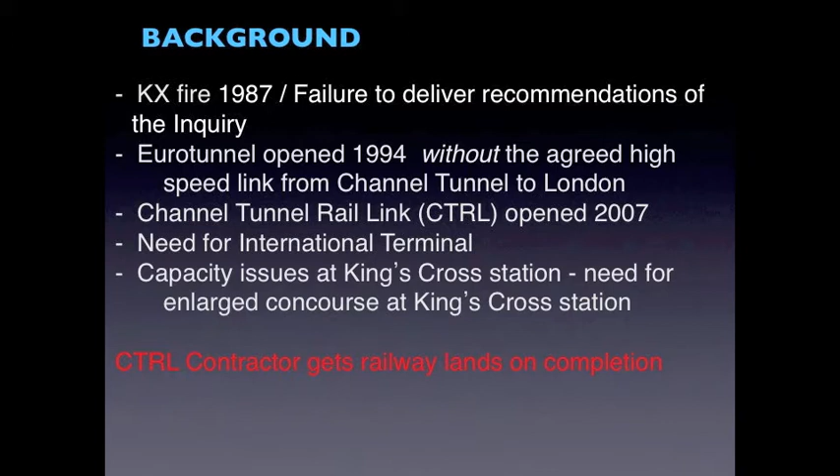The Eurotunnel opened in 1994. There was a treaty between Britain and France that both countries would deliver high-speed rail from their capital cities of Paris and London to the Channel Tunnel. France had their high-speed rail in place a year or two before we opened, but London never got round to it - Margaret Thatcher couldn't figure out how it would be funded, so it wasn't delivered. So the Channel Tunnel opened, and you'd come high-speed from Paris in an hour and a half, reach the Channel Tunnel, then take another hour and a half to get to London. That was a reason the high-speed link had to be delivered, and it was decided it should come into King's Cross.

There was a need for an international terminal, so even though you had these two stations, none of them were accommodating 18-car trains. They were mostly 6 or 8-car trains, so there was a need for that. And there were capacity issues at King's Cross Station.

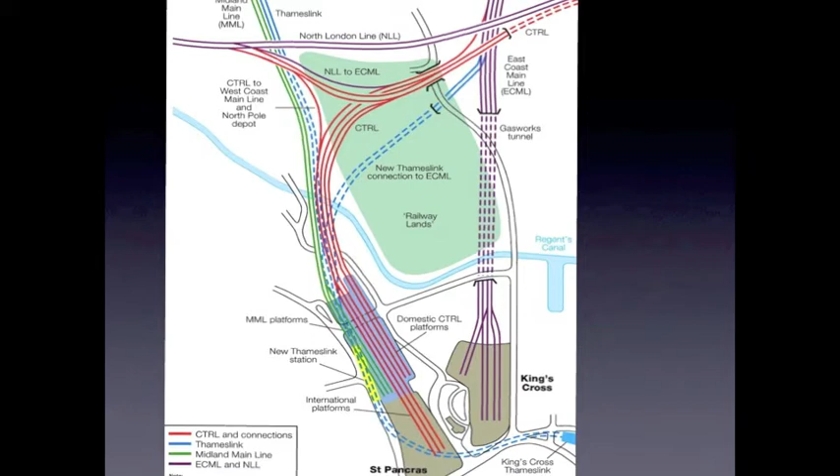So strategically very important. As you can see, it really was the main link from London through to Paris, but also Brussels and Germany. This is the rail infrastructure at King's Cross and St Pancras. So many lines: West Coast Main Line, East Coast Main Line, Thameslink, and a host of 6 tube lines underneath all of that.

So that was sort of the starting point. I won't dwell on this, but if you look at the bottom line, you can see the sort of magnitude of growth that we were having to prepare for.

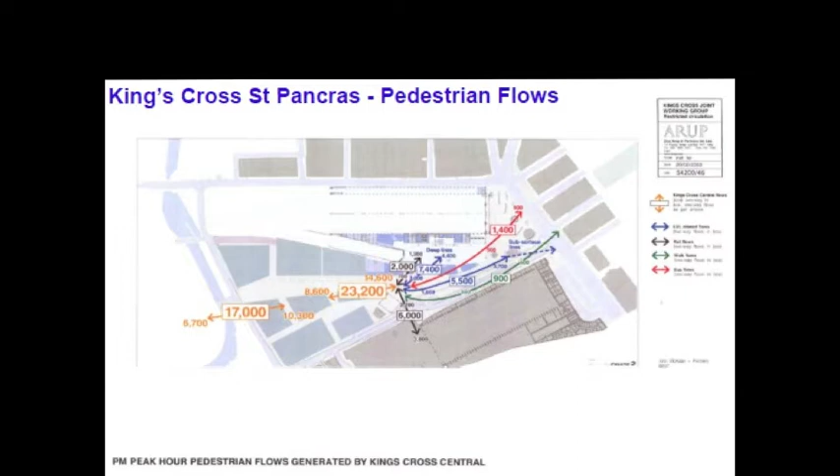What we did initially was understand pedestrian flows, so there was a lot of analysis to try and understand, with all the services coming in, the peak service. You're talking about sort of 23,000 in the peak hour movements just in the center of this hub.

So what's being delivered now, some of it has been delivered and some of it's still being built. The Eurostar terminal is there now, the international terminal, and the high-speed rail, which also has a high-speed rail link to the Olympics, was an important part of our bid for the Olympics. You can get from King's Cross to the Olympic site in 6 minutes.

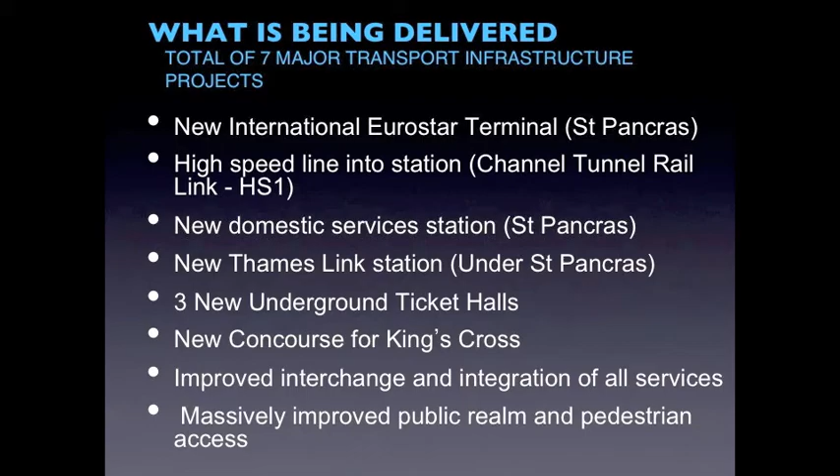Our Olympics is going to be the first Olympics that you can't drive to. Only competitors will be allowed to drive. So that will be the key link.

Lots more: 3 new underground ticket halls for the underground, a brand new concourse for King's Cross Station itself, and interchange. Getting that seamless interchange was massively important to us. And then the quality of the public realm, so that you should come out of the station, know where you are, feel very comfortable, and actually enjoy it, so that it would be a pleasant place to be.

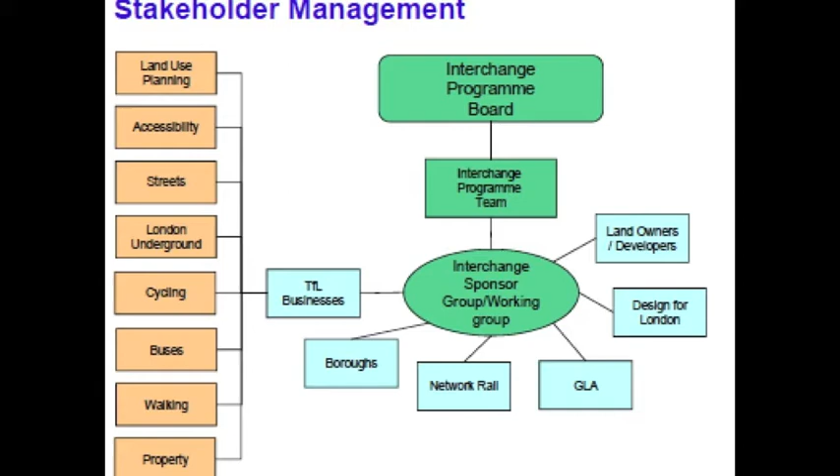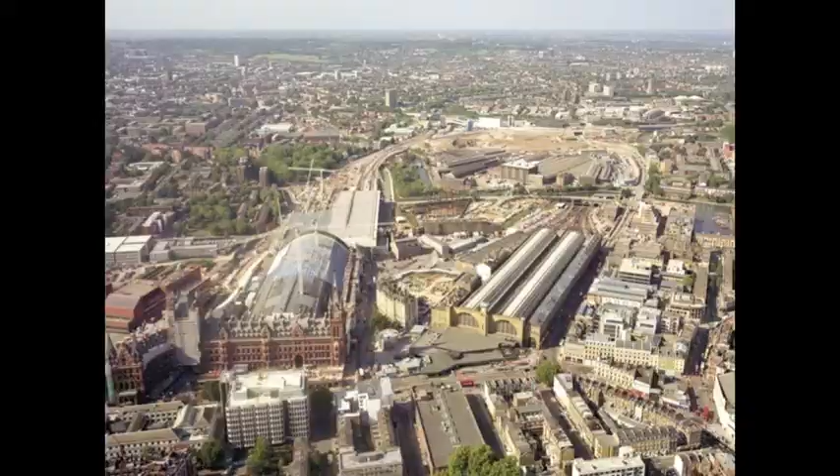And that gives you an idea of the complexity of all the stakeholder management meetings, 20 people at least, always. Quite complex getting everybody to agree, because you had Transport for London, we were responsible for some of it, but then you had National Rail, Network Rail, responsible for the rail stuff. There's a private company delivering the Channel Tunnel rail link, and it goes on, then there was a developer going to develop all the land.

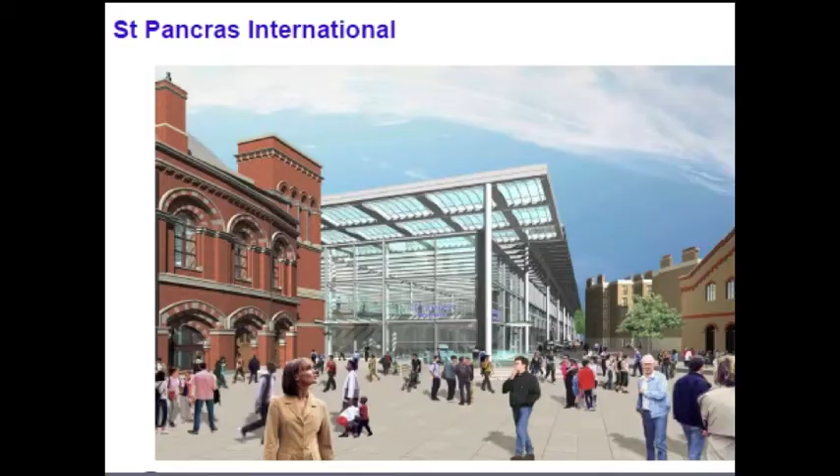So that's the new entrance to the international terminal. That's a picture, but it is open now and working. This is the new concourse.

That's being designed by John McAslan. Well, it's being built now, it's being designed.

This is what the new terminus looks like, and the interesting thing is St Pancras Station, a very old station. It was hideous. It had suffered bomb damage during the war, so all the glass on the roof had just been covered over with kind of waterproof paper pretty much. It was hideous, and this was completely decked over.

This is a Norman Foster project. He basically cut holes so you had a sort of public access concourse at the lower level, but that you could see the light. The light would filter right down to the bottom. It is a stunning place now. It's been incredibly successful. Lots of costs.

This is being videoed, so you can look at that at your leisure. Very, very expensive project.

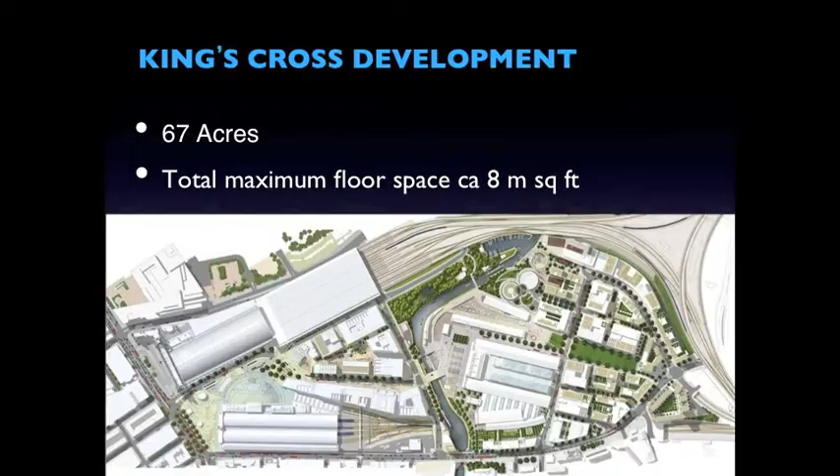On the back of all that is a development project. This is the development proposal, which I dealt with the planning permission about 6 years ago, and it's beginning to be built out - a very, very large development. That was the goodie bag for London Continental Railways, who built the Channel Tunnel rail link. The agreement with the government was once they'd built it and it was operational, they would get the land to develop, so it's up to them how much income they generate from the development - obviously they've got a vested interest to make this really work.

There's lots of heritage buildings on the site, including probably the first multimodal interchange ever built - the brick building you see at the center, which was on about 5 levels. So you had canal, rail, and road. Back in the 1800s, built in about 1850.

The University of the Arts is an amalgamation of 3 of London's biggest art schools, all the ones you've ever heard of, amalgamated into one in a new home. The developers of the land made significant contributions towards the transport, but that's a drop in the ocean compared to the cost of the package.

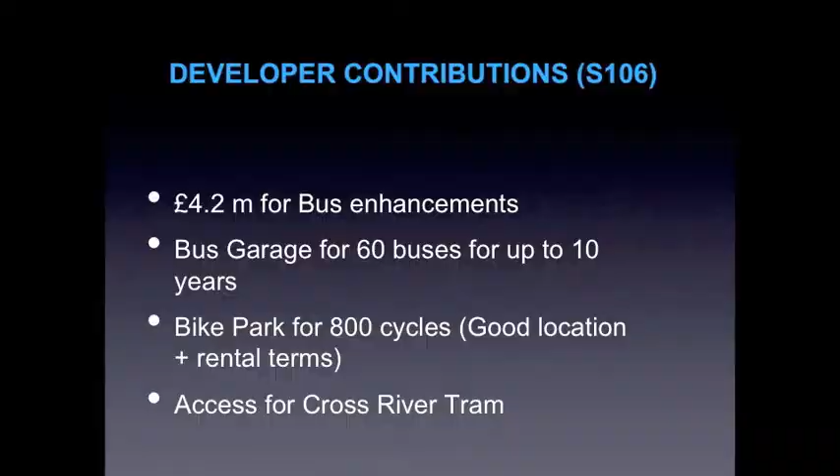Waterloo is very different - you've got a railway station hemmed in here, very tight. You've got lots of residential on one side, and all the major London cultural facilities along the river on the other. The problem is this is a huge block causing severance in the area, so people who live behind it can't get through to enjoy the cultural facilities and parks by the river. So one of the issues has always been, how do you make that station more permeable?

So that's what it looks like from the outside, looking in towards the station. It is the UK's most busy station, so it's incredibly busy.

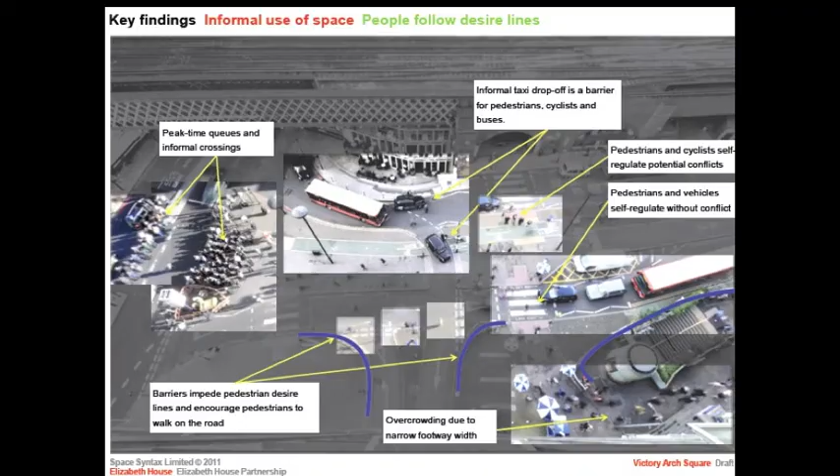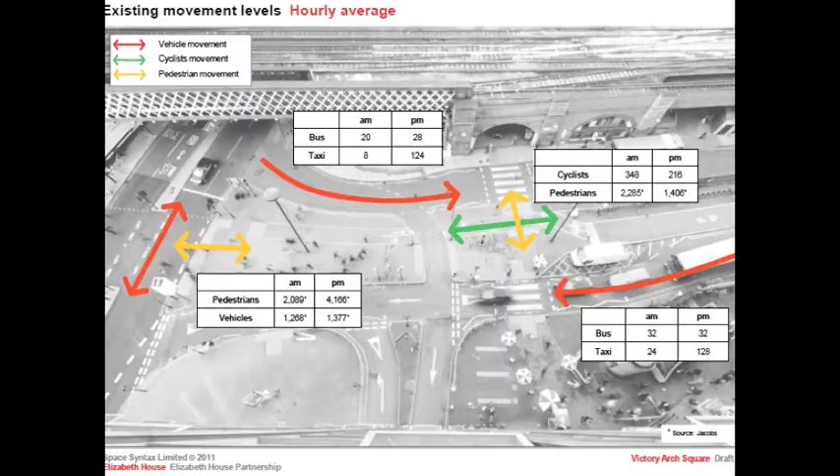Very quickly, this is the kind of analysis we typically go through, looking at all the problems with the station - the fact that it's congested, that there are conflicts between different modes, that pedestrians can't get anywhere. So the analysis first looks at what the real numbers are, understanding the numbers, then looking at all the conflicts - do those journeys actually work, are they possible to make without colliding with others? Then looking at them in separate modes as well, so looking at cycles and walking and trying to separate them out.

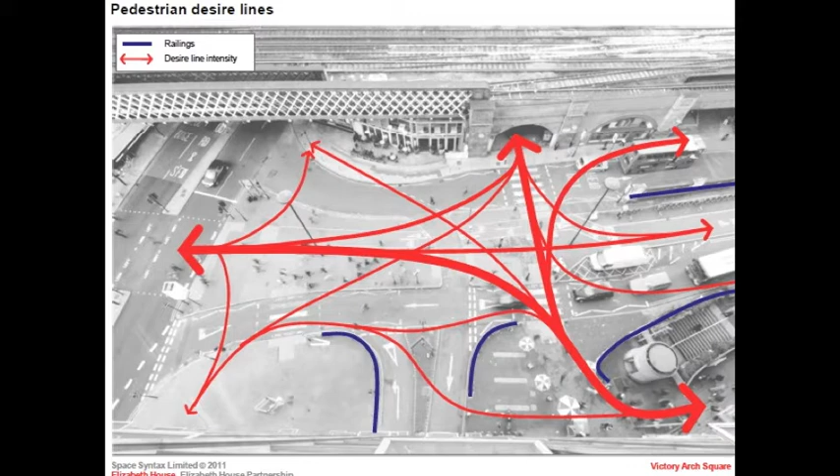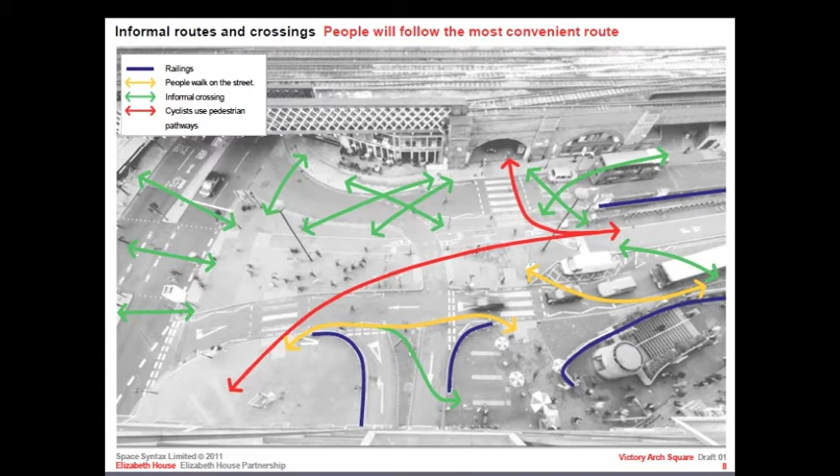The complexity - it's a platform lifted up in the air on 2 stories of railway arches. I don't know how many millions of bricks are in there, but it's all brick, built in the 1800s, and it's a myriad of little cubby holes and passages underneath. It's mostly just used as storage at the moment.

Looking at the top - the crazy thing we did, because we hadn't delivered the Channel Tunnel rail link before we started King's Cross and thinking about that, is that the Channel Tunnel rail used to come into here, and this was the international terminal. This piece was added onto the station in the 90s to bring the Eurostar trains in - not high speed admittedly, but slow speed, through South London and terminating here. When they built the Channel Tunnel rail link and planned and designed it, they said it was absolutely cuckoo to bring it into South London - it needed to come into North London, it was more cost effective and everything else. It comes into King's Cross now.

So this has been fallow - the new international terminal opened in 2007, and we've been trying to figure out what to do with this station. Network Rail, the operator for National Rail, has a mandate from the government to lengthen the platforms to 10-car operation in the next couple of years, and eventually to 12-car operation. Most of the trains coming in at the moment are 6 or 8 car.

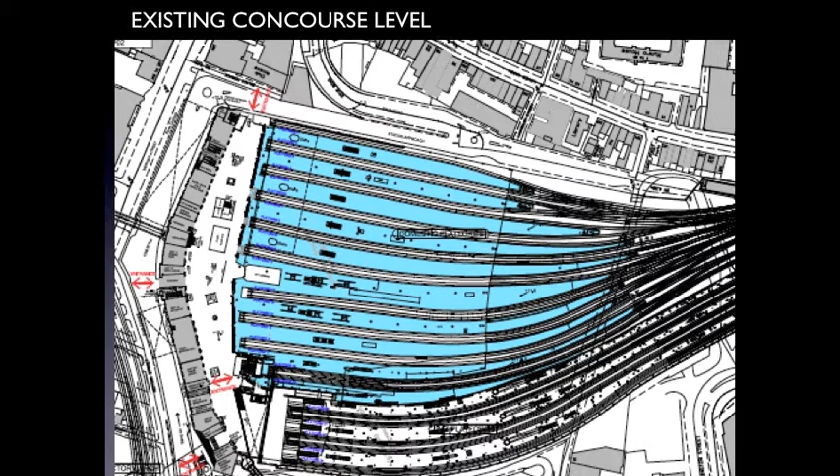So there's a problem, because you can see those platforms there only take 8 cars, and they can't be extended further back because the lines are getting closer and closer, so there's no room for the tracks, or the platforms rather, so that's the problem.

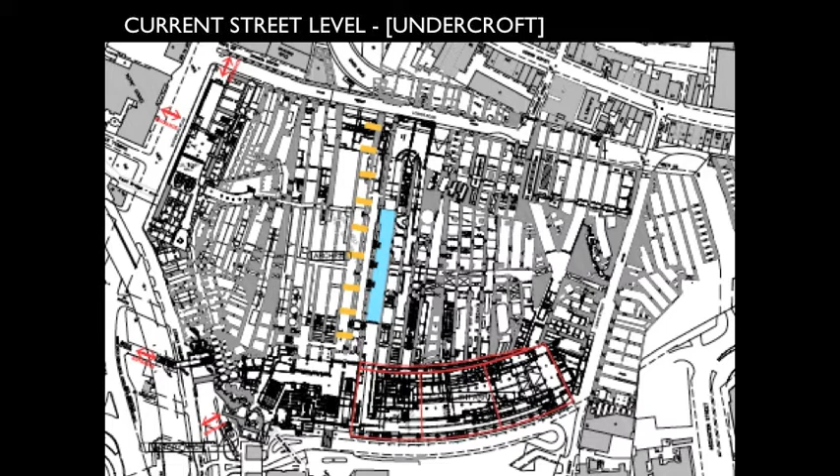So if you strip the roof off, you can see a bit better. You can see the very long Eurostar trains were 18 cars, so they were very long, came right up to the front, and they just could be accommodated.

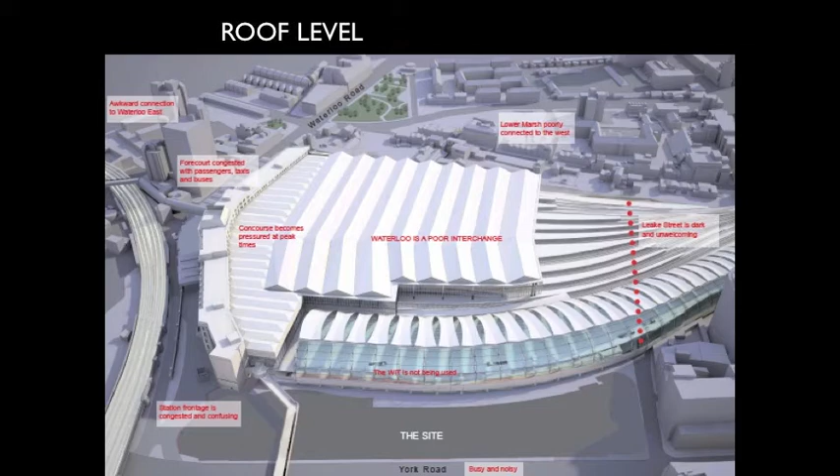But now that those platforms aren't being used, the obvious thing is you're going to put the longer 12-car trains into it, while you also fix and modify the other platforms.

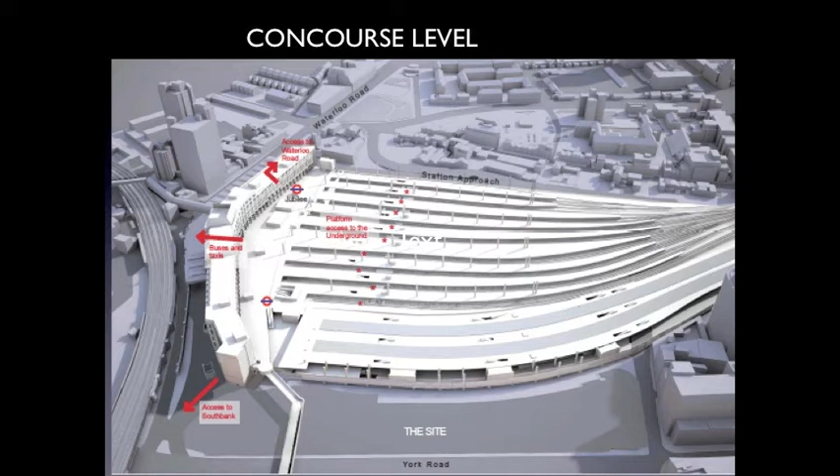So thinking about that, and then below, thinking about how at the moment you can come down off the platforms into one of these horrible corridors in the brick vaults, and you can sort of vaguely make your way to the underground, but it's kind of difficult, and that's what it looks like. You can imagine when that's congested in the peak hour, it's absolutely horrific.

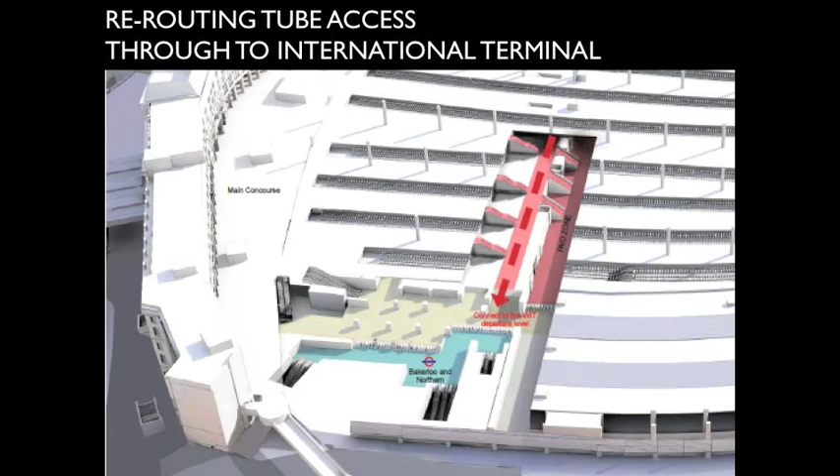The key thing is to try and see, well, could we actually separate out journeys and movements and eventually get to a passage that went right the way through the station. So that's been the overall objective.

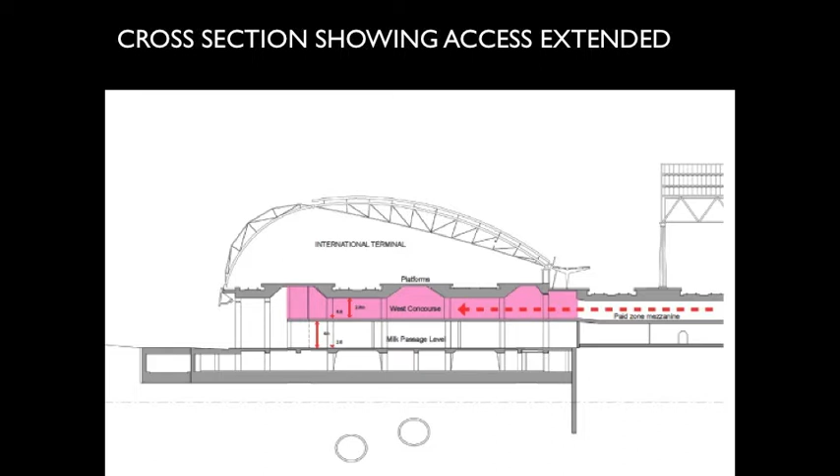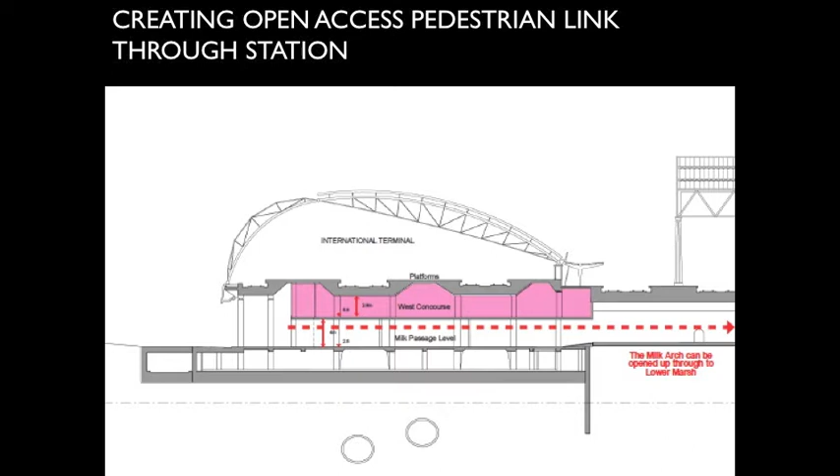So at the moment, they're coming through at that higher level, and then they drop down. The idea is to bring all the tube passengers through at the higher level and create the lower level for public access, so unpaid access - you can just get through the station.

On the side of the station, we've also got an elevated taxi and bus road. It ramps up, because the station is up in the air, 2 stories up in the air, they ramp up and you can drop off, but that in itself has problems.

So the idea is to drop that down, create a new bus station at the lower level, so you'd come out the side of the station and you'd have interchange with all bus routes there and taxis, and that would all be gotten out of

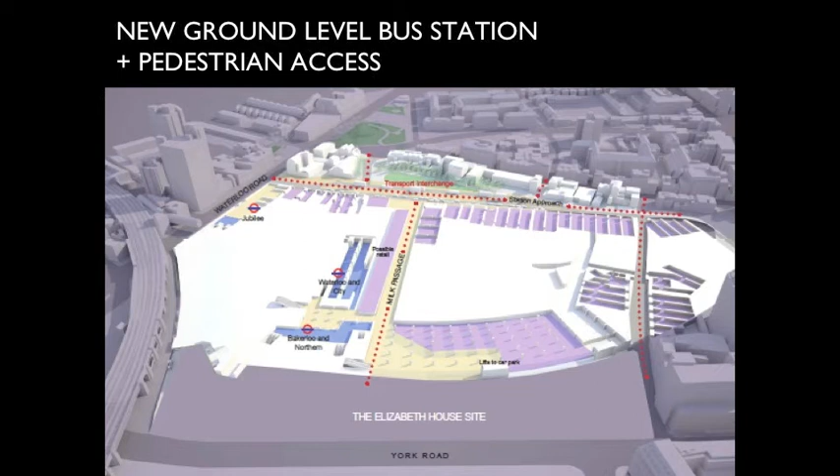the front area, which at the moment the taxi ramp sort of ramps up here and then comes along here, and you can come out of the station at the moment and pick up some of the bus routes and taxis up here. But in the future scheme, this is at the ground level, you could either walk all the way through, and there's a market just behind those white houses, a street market, so that would be more accessible. Everything ideally will be much easier to navigate.

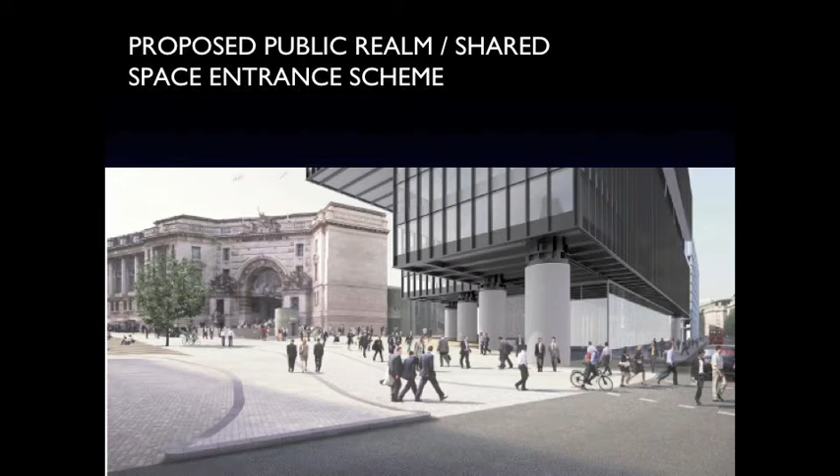So this is the proposal through development. It will be completely opened up, new development that's going to go ahead, and then you have a sort of shared space approach. In the initial scheme delivery, which could be in 4 or 5 years' time, buses and taxis will potentially still be running over it.

But if the further station improvements come along, then all of that could move over to the other side, to that bus and taxi interchange on the other side, in which case the shared space will pretty much just be cycles and pedestrians, which will be obviously much better.

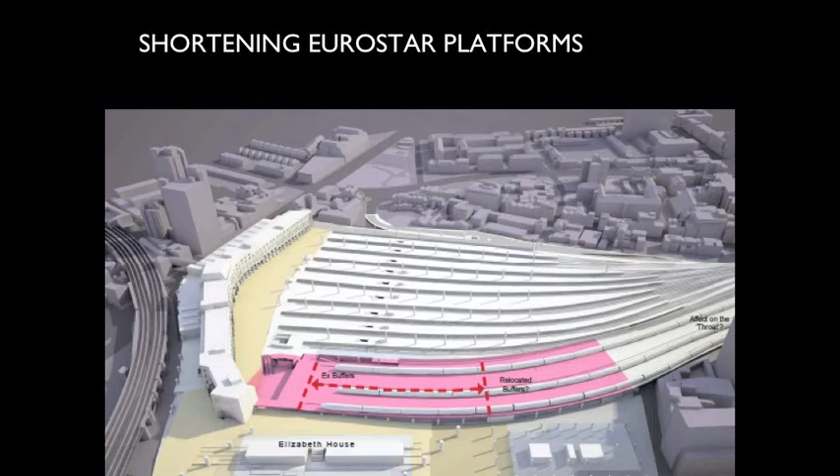Eurostar platforms, which at the moment run all the way up to the front - where that dotted red line is, effectively the platforms will be pushed back, cut back. We don't need 18-car platforms, so they'll go back to 12, and you create a hole there, get the light in.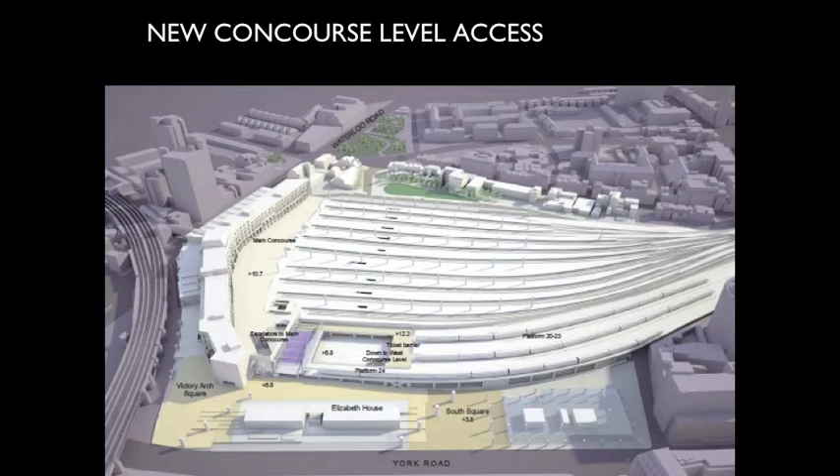It's a very interesting, beautiful structure, by the way, built by Grimshaw. Very interesting structurally and very attractive. So we want to retain it and be able to see it.

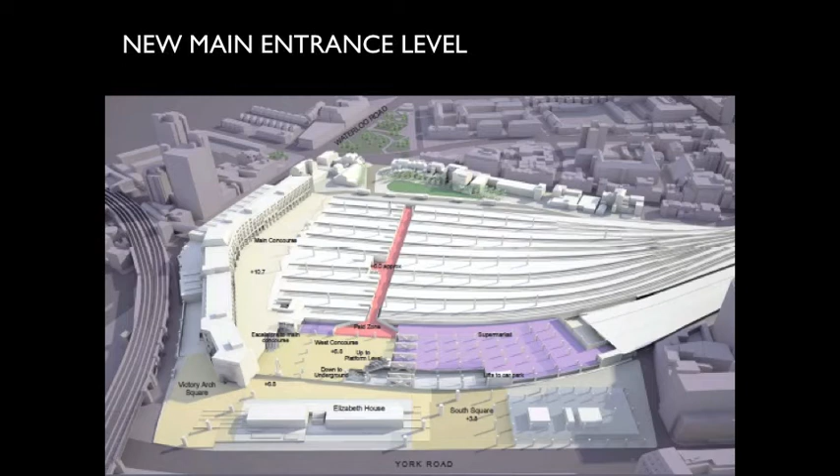And most of the time you can't see it. So this will allow a public space in the middle there, and you'll see the structure. You'll have the link through to the trains, and you'll also have a link at the lower level all the way through, and then all the purple will be future retail. So you'll either come off the train and be able to use the retail, or as the public living around there or visitors, you'll also be able to use public access retail throughout.

That's the proposal for the development at the moment. It still hasn't got planning permission. UNESCO are objecting violently because you can see it when you're standing next to the Houses of Parliament. So it may not look like that at the end of the day, but that's as far as they've got.

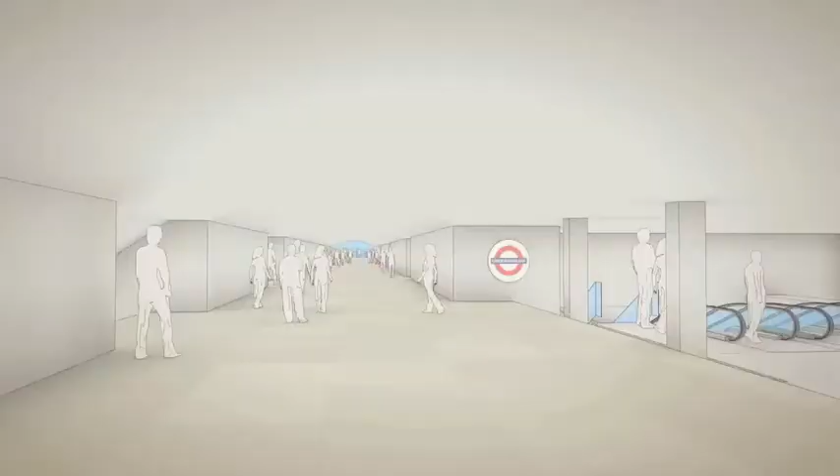So this is a fly-through that Hopkins Architects have done to show how it might work. It's basically everything I've just told you, but this shows how it would feel if you were running at high speed. You come into this new retail area, and you'll be able to take escalators up to the train levels.

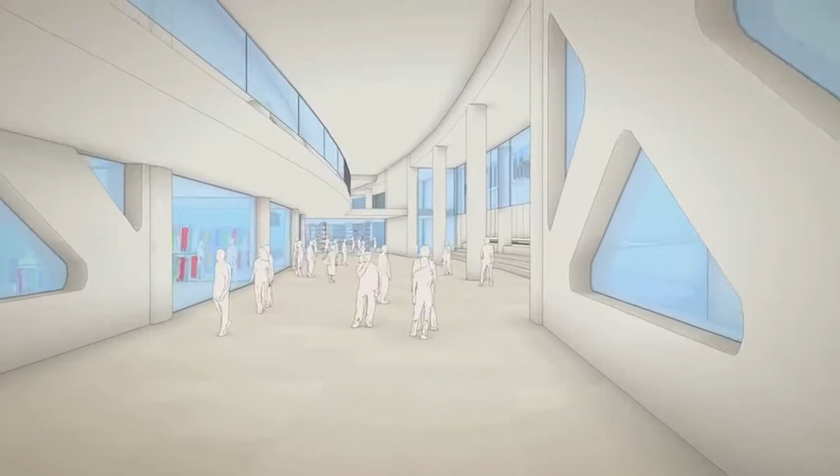Approach towards where you'd want to go to the tube. You know what the tube is, I take it - the underground.

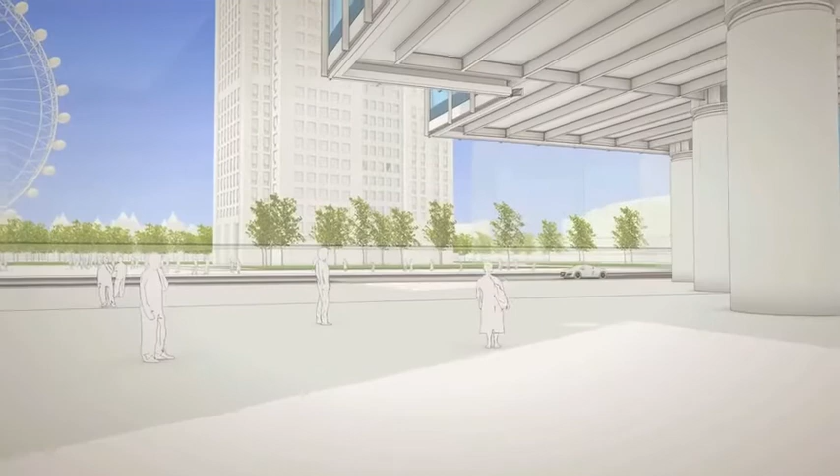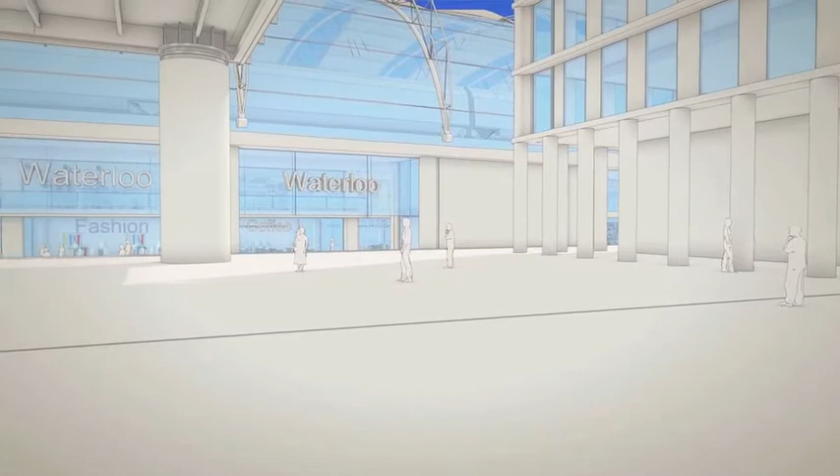This is coming out a bit under the new development. Part of the new development - there's a long 1960s or 70s slab block which completely cuts the station off from the London Eye and the rest of the facilities on the South Bank. So by breaking the new building into two, you create another opening, so that as you come out of the station you immediately see the iconic London Eye and know where you're going.

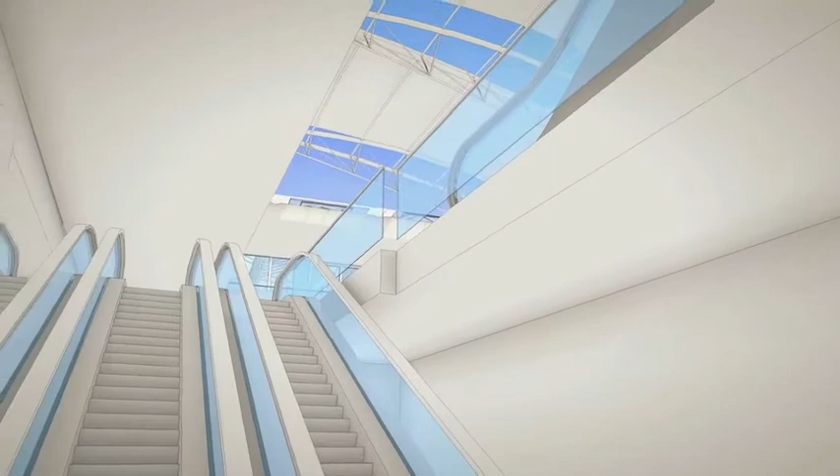There you can see the structure of the Grimshaw roof, with these curved trusses which are very beautiful. You get solid and glass, so you get this very nice light quality, which now you'll be able to see and have the benefit of.

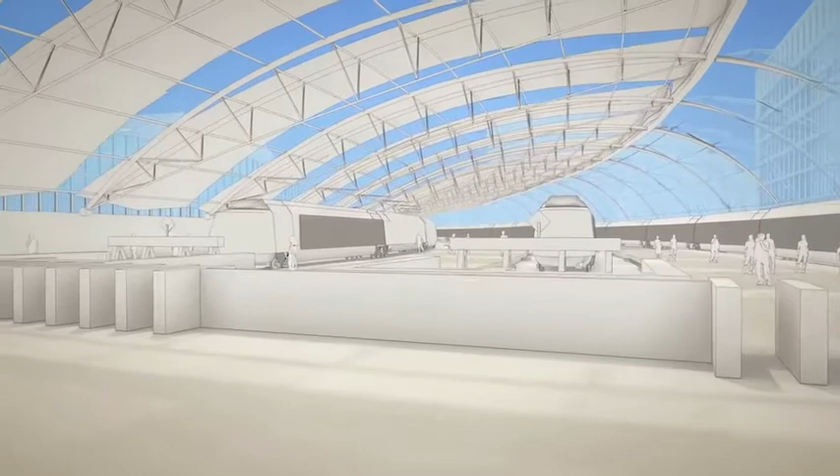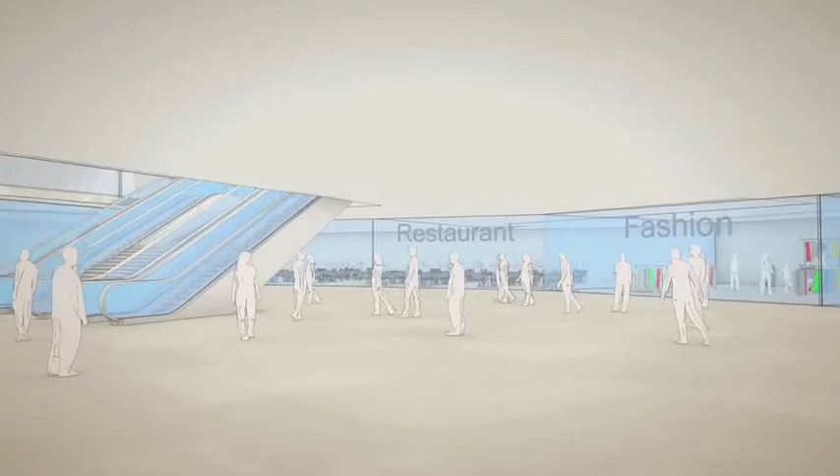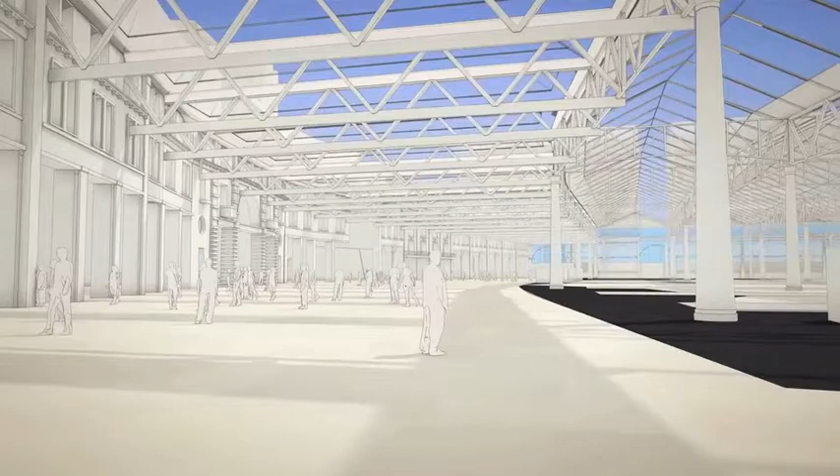And then you go up to the higher level, the concourse level, the departure level for the trains. So now you're up on the top concourse level - this is where you walk along, get your tickets, orient yourself for when your train's leaving, and then get onto the train.

It just wasn't working without the transport, so we had to look at how we could make the transport work better. The obvious solution was - everybody said it's not on the tube, so that's the biggest problem. So there was a study to look at extending one of the tube lines right through into the site. This was a major study undertaken by TFL.

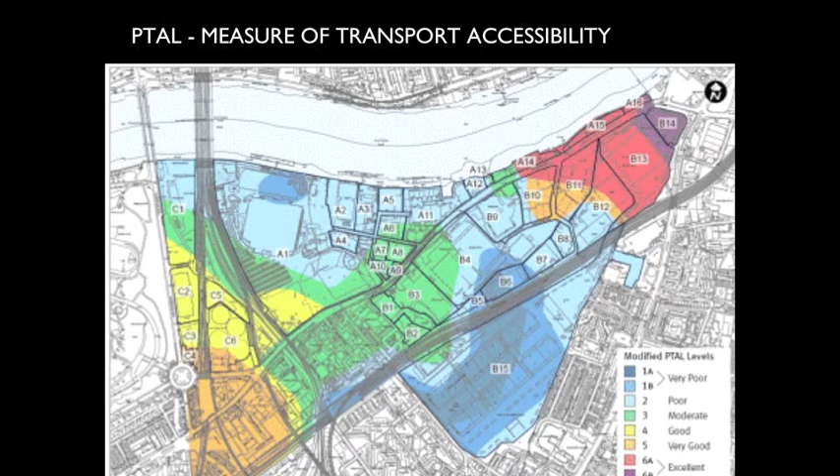I don't know if you use PTALs - does anybody know what PTALs are? This is a measure of transport accessibility that we use in England. It's called Public Transport Accessibility Level, PTAL. Red is good and pale blue is terrible. The site has all sorts of criteria about how far away you are, how easy it is to get there, and so on. You can see that the top of the site has good accessibility, but most of the site has very, very poor accessibility - that's the accessibility level across the site today.

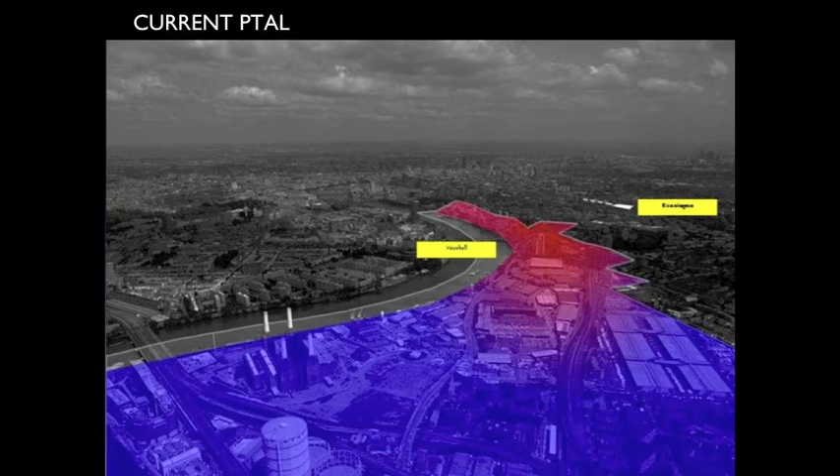You can just see the white line over there, which would actually be underground, the tube line underground. Now, if you extend it just to Nine Elms, which initially was just a short little hop, everybody thought that'll do it.

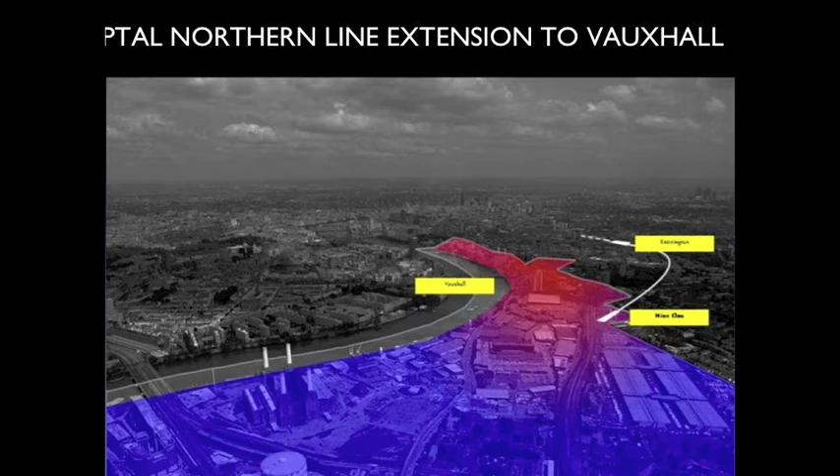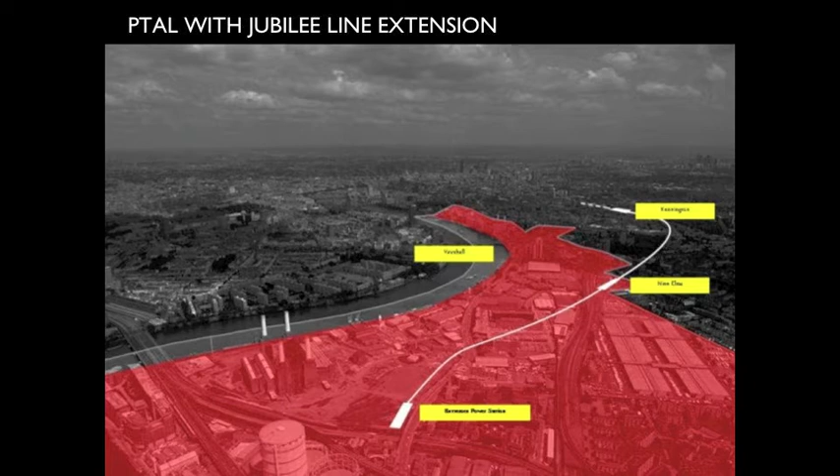It doesn't make any difference to the PTAL level. So you say you spend millions and millions of pounds—why would you do that if you don't actually improve the PTAL? But when you improve it, or take it all the way through to Battersea, the PTAL for the entire site becomes red, which is very good. So there was a very good justification for extending the tube line.

So the overall cost of the project is estimated at about £700 million. What we've looked at is how much the developers could contribute towards that cost. There's a requirement in British legislation that developers actually do pay towards mitigating their impact, so they have to pay anyway. It was basically looking at how much the development could afford. We did analysis, and the answer is roughly 500 million. We couldn't get it up to 700 million—we tried higher density, everything, but couldn't get it up to 700. So there was this 200 million gap.

So the proposal is to use a sort of TIF instrument, which we borrowed from the States—Tax Increment Financing. But the problem is that British legislation doesn't allow us to use that mechanism at the moment, so they have to pass an act of parliament. The government's very supportive, and they're saying this would be a good pilot for TIF. The idea is that you get the 200 million loan from the government, and then the business tax yielded over 20 or 30 years would go immediately straight back to the government, hypothecated to pay back that loan. So it looks like it could happen.

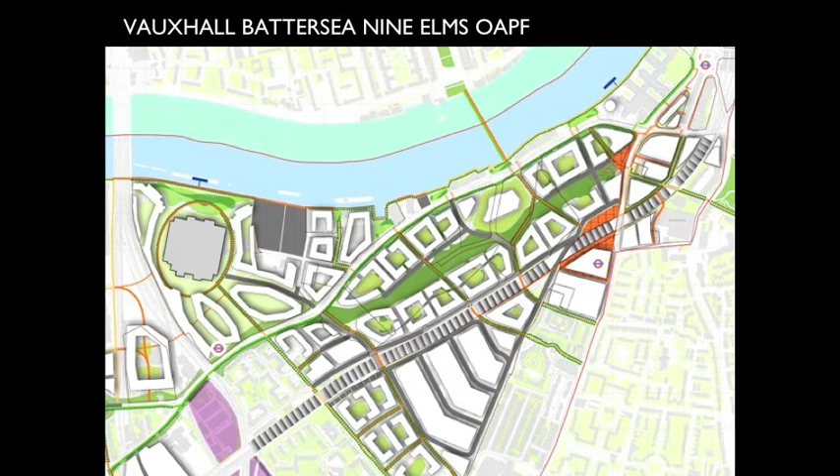This is the sort of master plan at the moment for the area—reorganizing the streets, overcoming severance. There's lots of severance because of railway lines and other things. The idea is to create lots of open space and park, to create a very attractive place. At the moment you can't get through it, so the idea is that you create these penetrations you can see here, where you'd actually create passages and roads underneath, so this part is linked with this part.

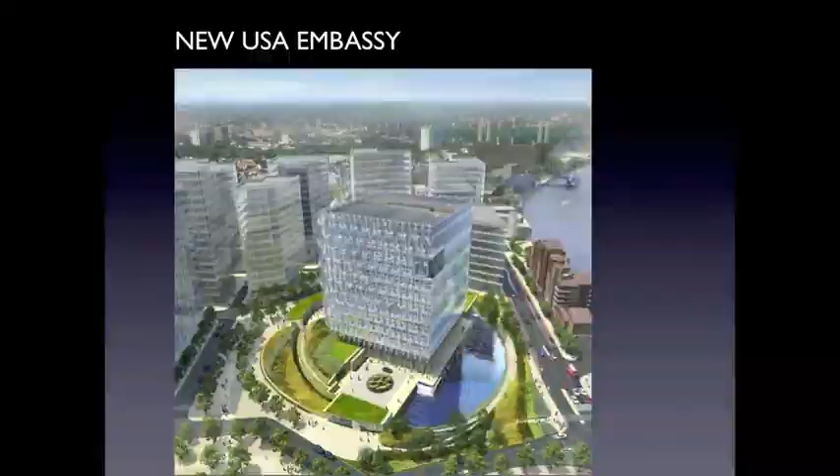And that building is the new American embassy. That's already, I think, under construction—they're doing the groundworks at the moment.

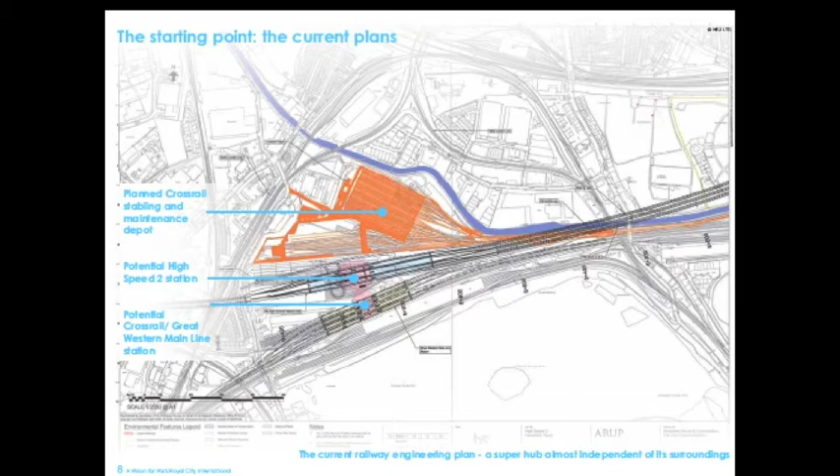Old Oak Common is an interesting area. It's further west, not so central as Battersea by any means, but it has a unique opportunity at the moment because we're building Crossrail, a high-speed rail link that connects with the underground. This is about halfway through its construction, due to open in 2016. But now we're also talking about a second high-speed rail link up to Birmingham from London. The first high-speed one was the one I talked about earlier that comes into King's Cross. This would go via Old Oak Common and then up to Birmingham, so you could get up to Birmingham in about under an hour, as opposed to sort of 2 hours and a bit at the moment.

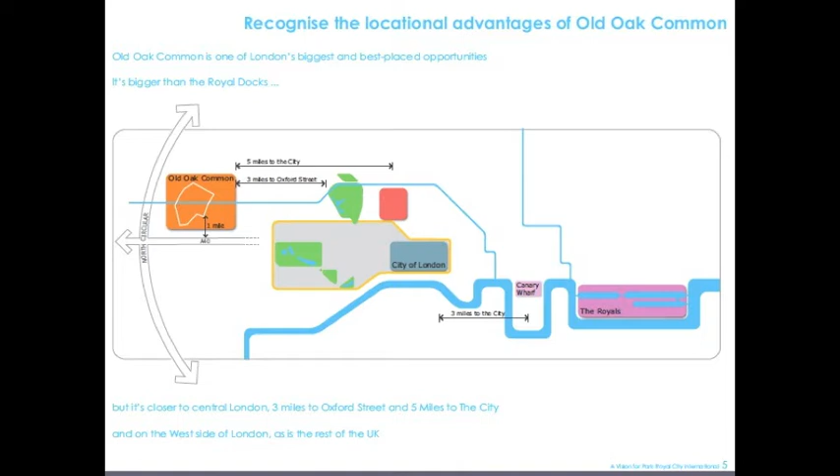The feeling is that you should place the new high-speed rail line to intersect with Crossrail, because this is a high-capacity, high-speed tube line, effectively getting you into central London, and that you should create a new hub here.

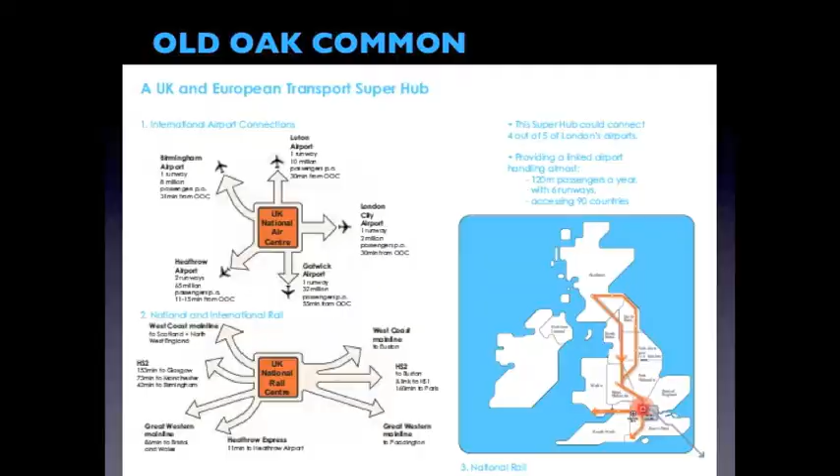The project is basically about taking advantage of the strategic rail opportunities, but there are also many highways that link at this point, or could be linked together, plus opportunity for light transit. So strategically, it's very well placed to connect an enormous number of communities that at the moment are completely severed and can only really connect by car. Car congestion is absolutely rife in the area, so you really can't get anywhere—it's very, very slow in the morning peak, and we're discovering more and more as we model it that by 2031 it's going to be gridlock all the time, so we can't rely on highways in the future.

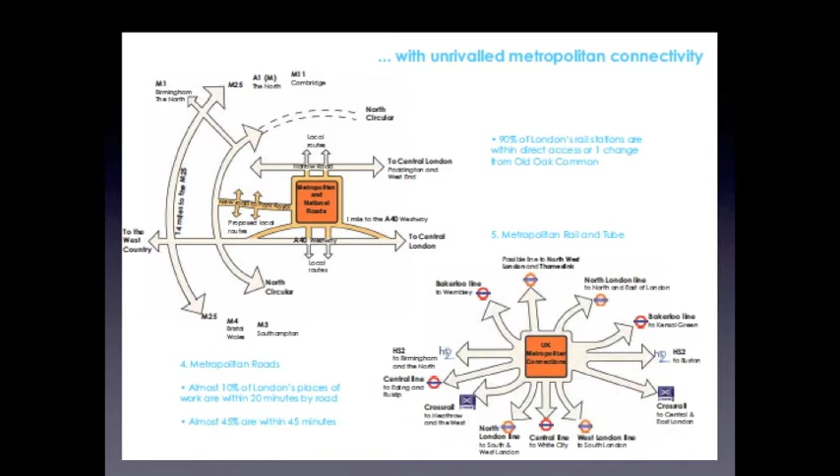So this is just sort of analyzing the strategic aspects of the site and its relationship to central London, in terms of both air and other rail services, and the local London services. It has the potential for being unbelievably well connected if you put in the links that are needed to make that happen. Park Royal at the moment is just a massive industrial park, but access only by truck. It's underperforming, and for years we've been trying to think how to sort that out.

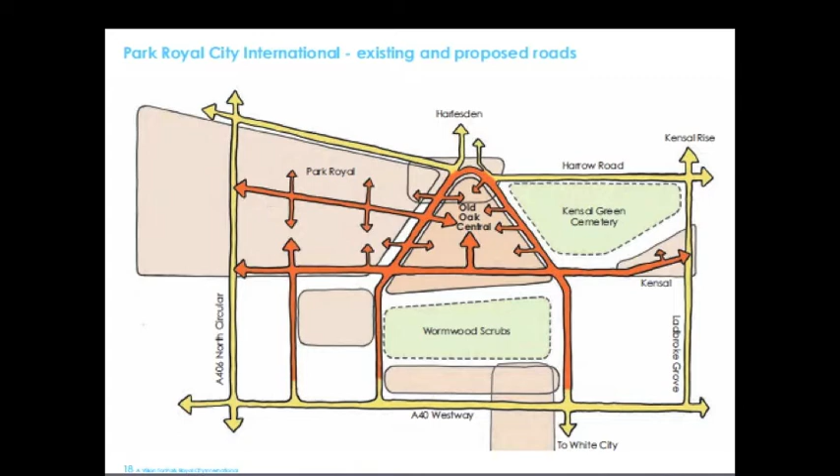Old Oak Common, again, similarly, is a kind of enclosed almost wasteland of light industrial and not very high yield uses. Really don't contribute to the economy.

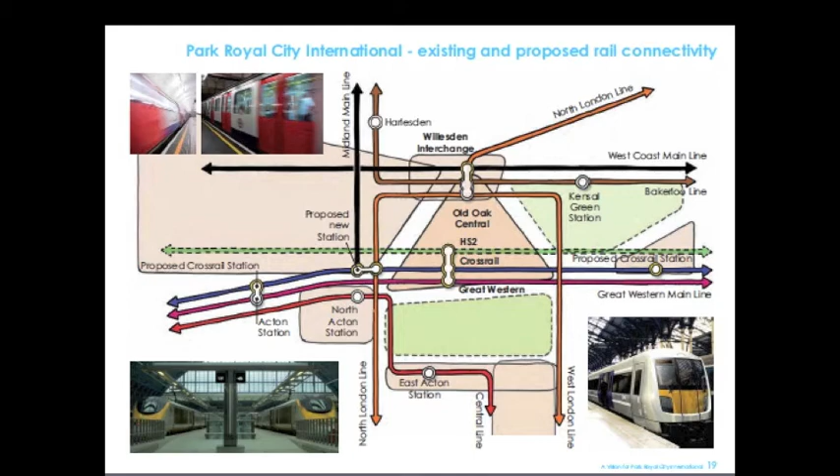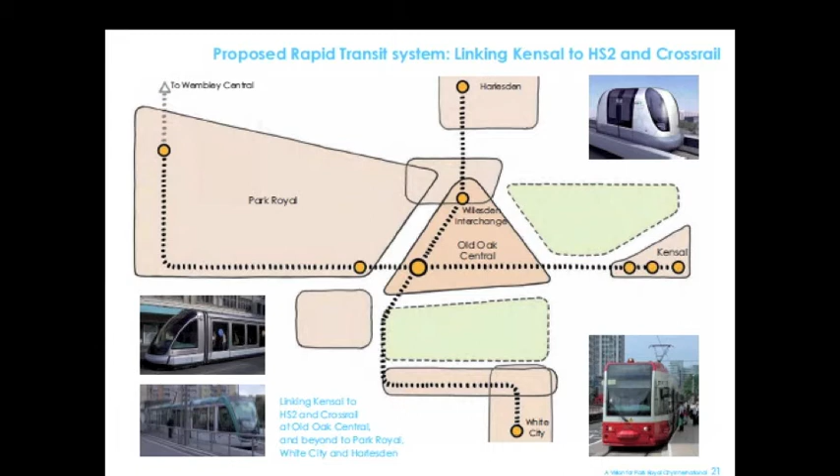But by dividing this zone up into different zones, you can actually link them all together with this high-speed hub in the center, so you adjust the highway network to get that to work, then get the rail to work and interconnect with everything, and the light transit as well, so ultimately it becomes a very highly connected place, with the potential for a lot of homes. There's a canal that runs through as well, so exploiting that, getting the green links, so that it becomes an attractive place. At the moment we're looking at something like 10,000 new homes and 40,000 jobs, but very importantly, a massive contribution to the UK economy.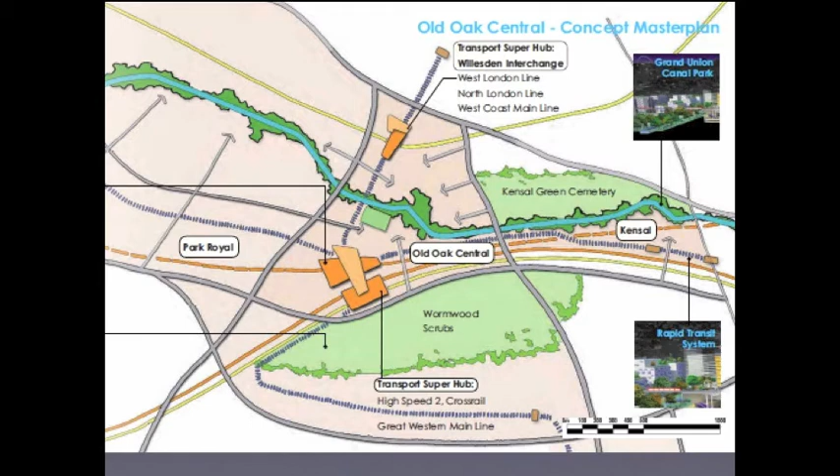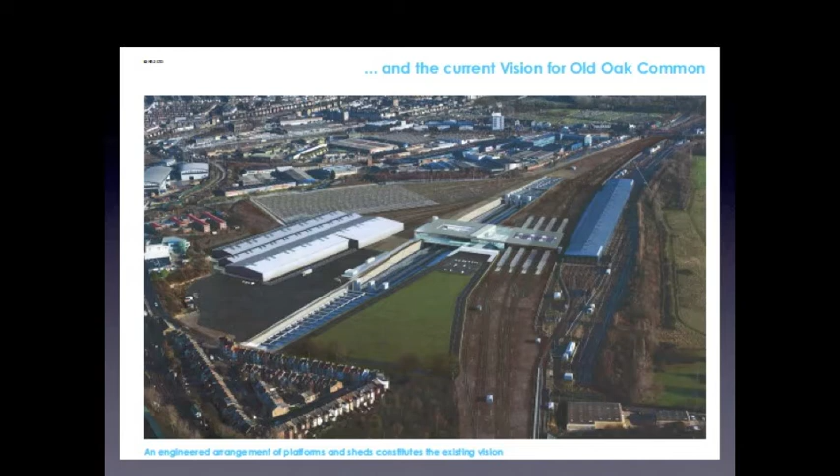This is just developing the plan a little bit more. It's just at a very early master plan stage, but you can see the potential for getting massive housing in there. This was something like what the railway station would be, with the high-speed rail, Crossrail, and light transit all interconnected at the hub. You'd be getting a multi-layered kind of sandwich of different functions happening with a lot of dense housing on top.

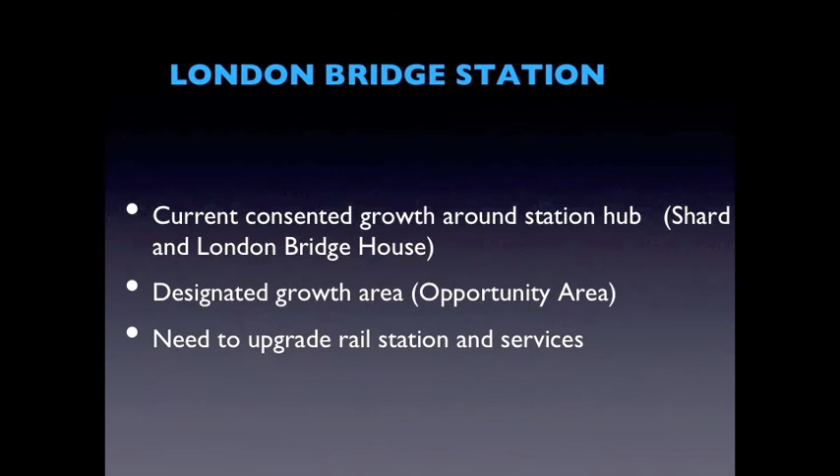So then this next one, London Bridge Station. Interesting, there's Europe's tallest building, the Shard, being built there. It's nearly finished, and London Bridge House as well. So high density developments already happening around the station. Huge capacity issues at the station.

The problem is the station needs to be somewhat reconfigured, because it was originally a terminus, then they modified it to make trains go through. It's on the south of the river, so they had some tracks that went through to the north of the river, but not functioning very well. It's been designated as an opportunity area, so despite the fact that we've had all this growth already, we are expecting more, so there was a need to upgrade the rail services.

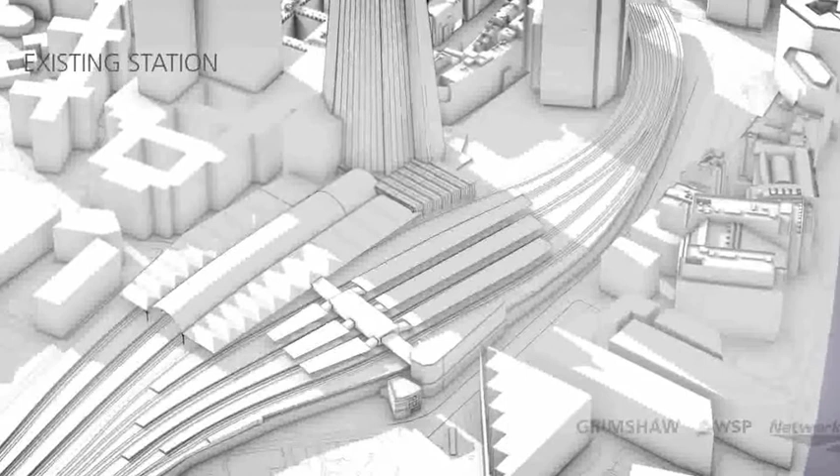This is Grimshaw again. Grimshaw did the roof at Waterloo, and again it's sort of reconfiguring the station, so this is how the station looks at the moment. That's taking you down, peeling everything off, to get down to the ground level.

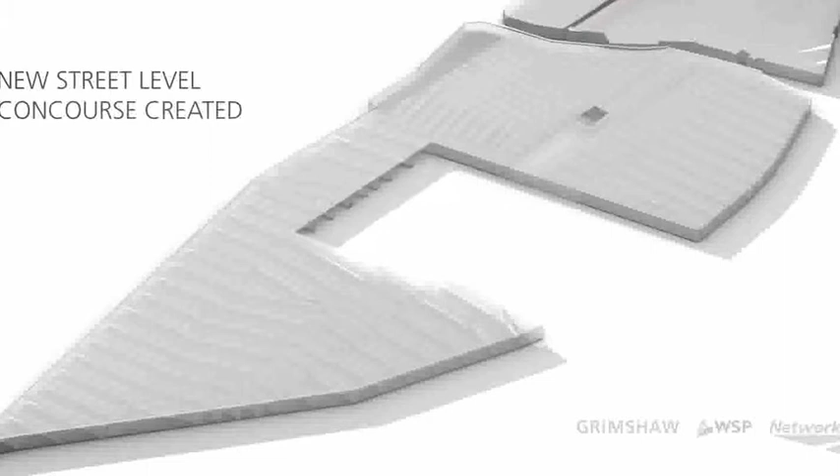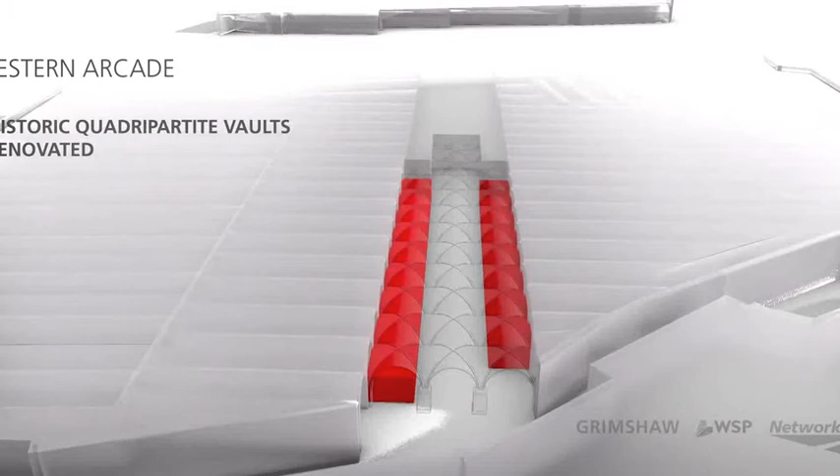This station suffered from a very similar problem as Waterloo, in that it's massive severance. You can see, I can't remember, I think there's probably about 12 tracks. It's not as wide as Waterloo, but nonetheless, enormous severance. There are two little tunnels that go underneath, jammed full of trucks and vehicles, so it's a very unpleasant place to walk. The idea is to create permeability through the station, all the way through, so you'll be able to walk unpaid, without a ticket, through from either side.

This is showing how you sort of preserve the historic fabric. It's a very fine brick structure, so part of that will be preserved in the new scheme.

This is a little bit slow, I'm sorry, but once they've created the passage, then they put in new structure, escalators up to all the platforms. At the moment I think most of the platforms are only accessed by stairs, so it's quite difficult to get up there anyway.

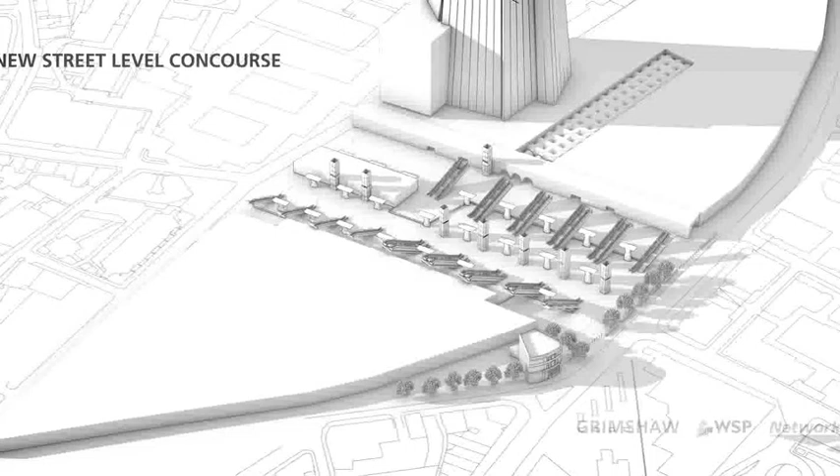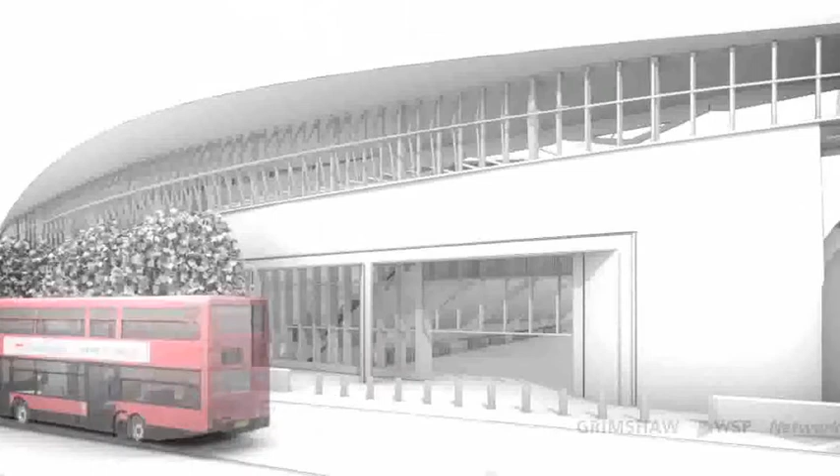Then finally you get new canopies on top, so you can see the extra track going around the outside, and the roof going on, with an approach to the roof that not everybody's very happy with, because not the entire platform is covered, so there's a fair bit of discussion going on at the moment as to whether it's acceptable to not cover the entire length of the platform.

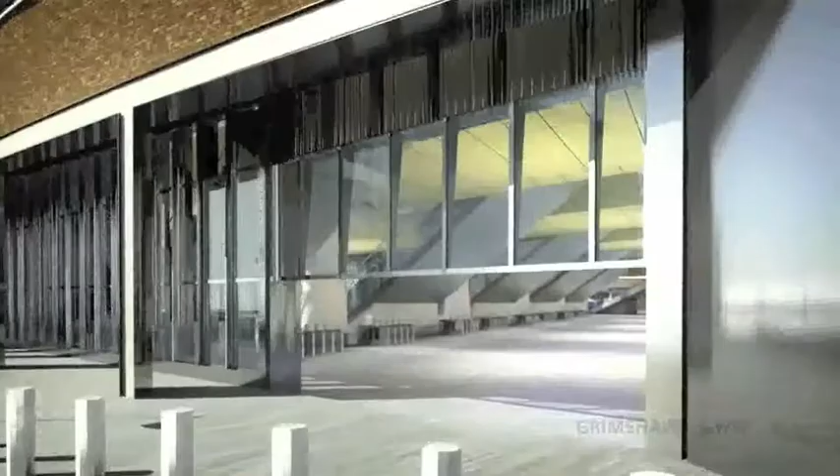But this is what it would feel like once it's finished. Quite a grand space. Those are the ticket barriers you're coming into the paid side of the station now. You'd have both lifts and escalators up to every platform.

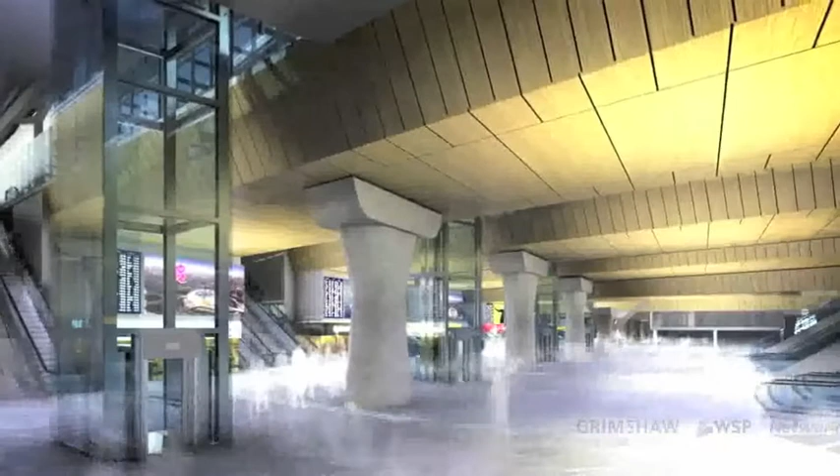Part of the problem is to get disabled access up to the stations. You've had to widen the platform. Some of the platforms are quite narrow, so you couldn't pop an elevator up through the platform, so they had to widen them, which means the stations had to bulge a little bit.

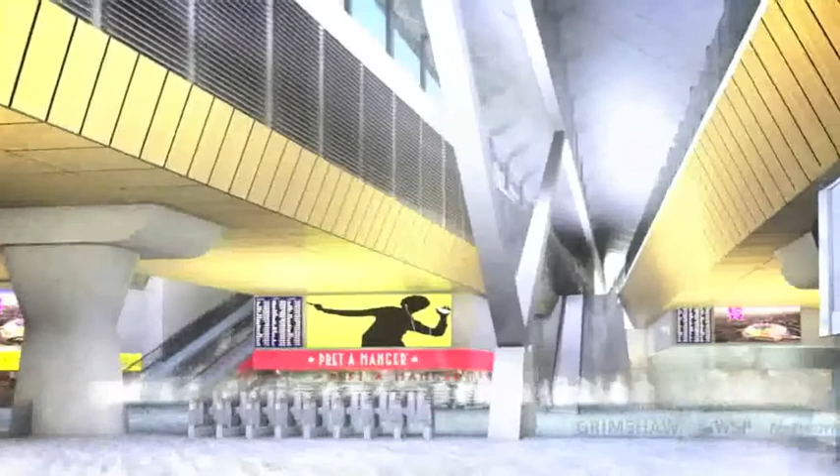So the big new structure obviously holds up the rail tracks above, but then you're cutting holes so daylight comes down to this lower level, which at the moment is completely cut off. That's something we've been trying very hard to do in all our station modernizations - get daylight down to the lower levels so you're not wandering around in darkness in low ceiling, unpleasant places.

Some things we've been looking at - obviously all these projects run into billions, and we don't have the money. Simple as that. How can we deliver this through development?

So what we've been developing over the last 2-3 years are development infrastructure funding studies. Once we do a master plan for an opportunity area, we know the quantum of growth that can be supported - we've done the transport analysis that says a certain quantum of development can be supported. We identify what infrastructure is necessary to support the development, then we do these infrastructure DIFs, as we call them, which cost all the infrastructure we've identified. At the beginning, we don't necessarily know what all those costs are, so we work out the total cost of all infrastructure needed.

Then we look at the other side of the equation, the total yield we can get from the quantum of development, and identify whether there's going to be a funding gap, or whether the development can fund everything. Sometimes they can, sometimes they can't. We need to know what the funding gap is so we can go to central government or other sources to plug that gap so it can be developed.

Because the principle is - our studies say - that you cannot have the development without the transport mitigation. They have to come together. We don't allow development to happen without that transport mitigation. So we have to work out a way it can be delivered, moving more to TIFs, as I said.